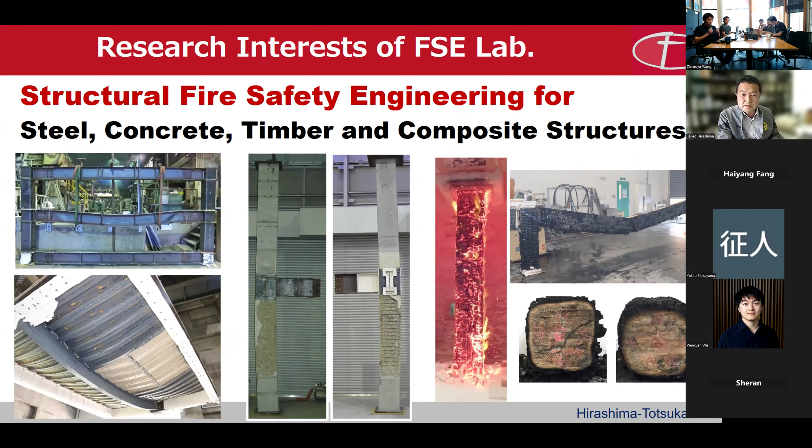Today, I'd like to present our study on the fire resistance of mass timber structures. Topics of the presentation are: backgrounds of the study on timber structures in fire, our studies on mass timber elements exposed to fire including the cooling down phase, and the current actual design of high-rise timber buildings in Japan. The next topic is timber-steel connections, presented by Mr. Nakayama.

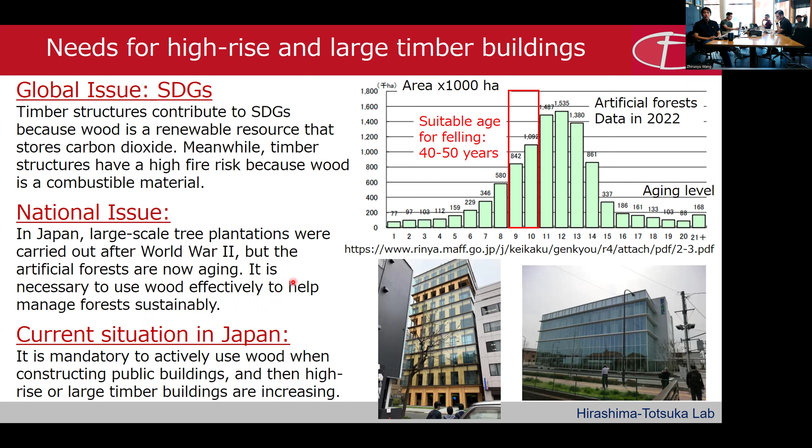SDGs is a global issue, and timber structures contribute to SDGs because it is a renewable resource that stores carbon dioxide. Meanwhile, timber structures have a high fire risk because it is a combustible material. In Japan, large-scale tree plantations were carried out after World War II, but the artificial forests are now aging. It's necessary to use it effectively to help manage forest sustainability. It's mandatory to actively use wood when constructing public buildings, and high-rise or larger timber buildings are increasing now.

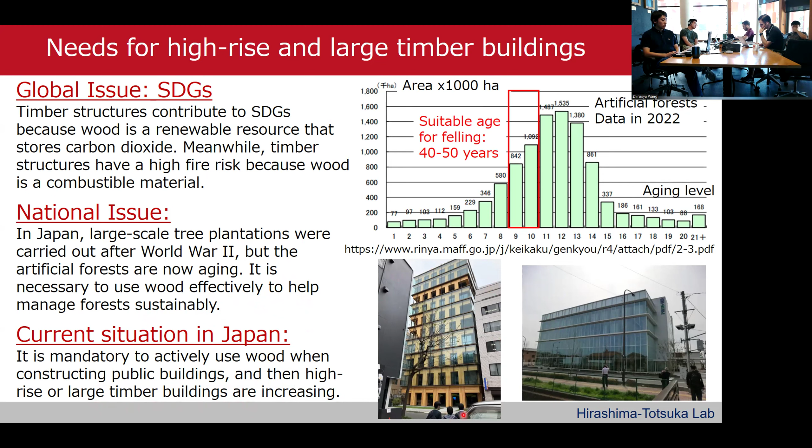Timber is a complex material to handle when designing structures because it is inhomogeneous and highly variable due to being a natural material. It is also orthotropic and combustible. Meanwhile, it is lightweight with high-grade insulation compared with other structural materials, so the density and thermal conductivity of timber are quite low values. Additionally, by using adhesive, it can be turned into mass timber elements.

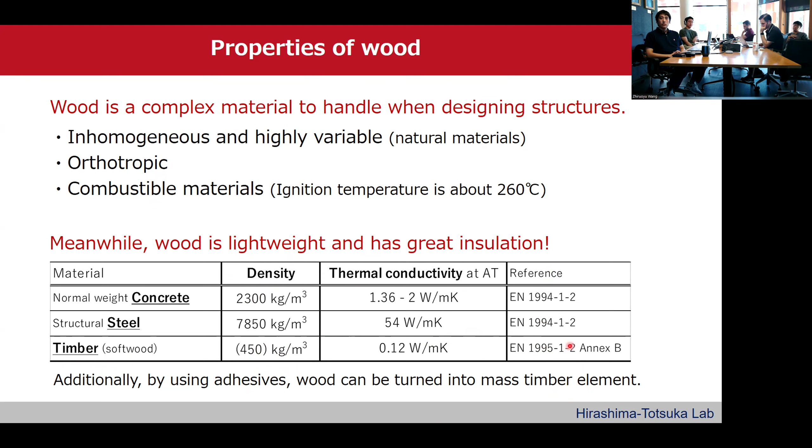The reduced cross-section method is the most popular method in the design of timber structures. It has low thermal conductivity, so the temperature inside the cross-section of a mass timber element remains low during a fire, and it can be designed using standard structural calculation methods. When using this method, the charring depth or charring rate of the wood must be properly determined. In Japan, the design charring depth is 0.75 millimeters per minute, which is approximately the same as that given in Eurocode 5 for softwood.

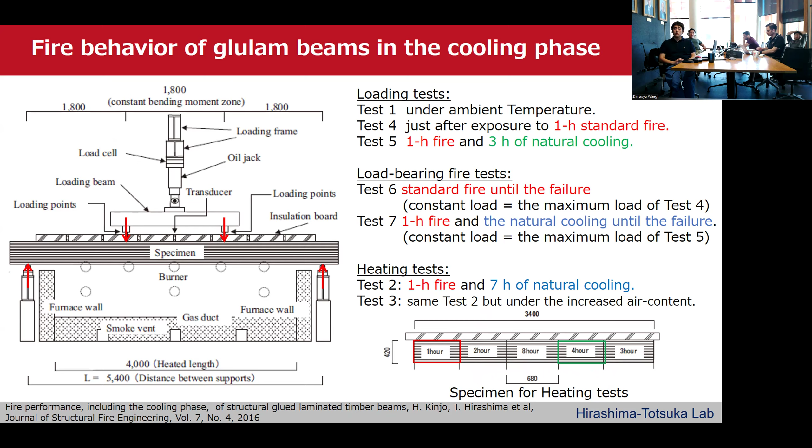The temperature at the center of the cross-section, the centroid, just after heating for 1 hour was close to ambient temperature. But then the temperature rose, reaching 100 degrees after 4 hours.

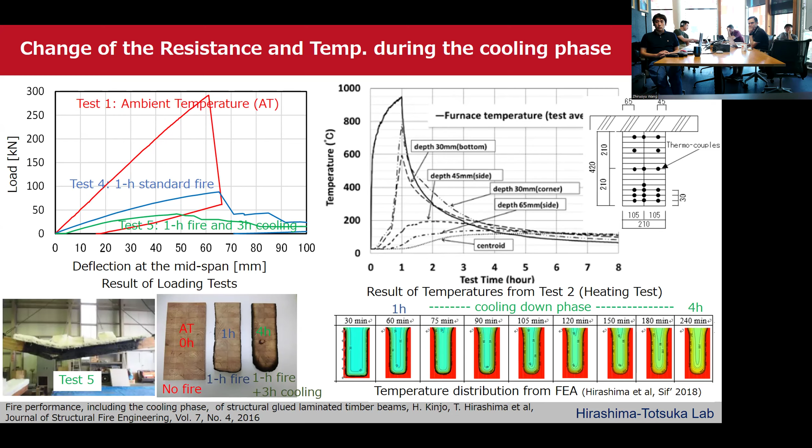Annex B of Eurocode 5 advanced calculation method gives the reduction factor for strength parallel to the grain of softwood.

The strength of wood at high temperatures decreases more in compression than in tension, and is significantly affected by moisture content. This has been demonstrated through previous experimental studies, and these figures are examples of those reports.

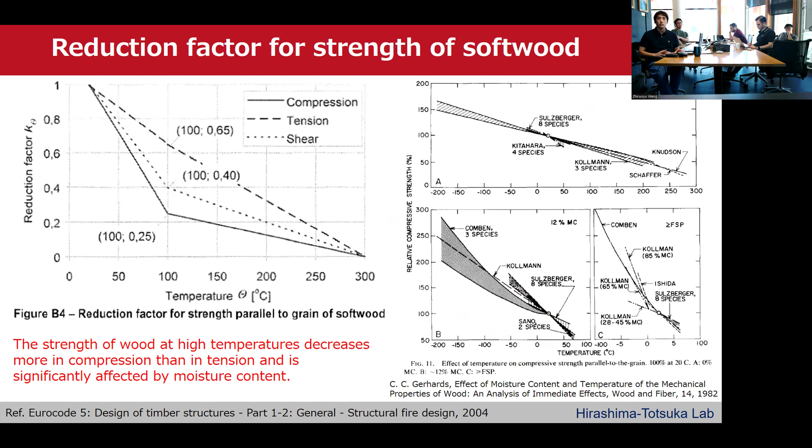So now I will summarize our background.

Due to increasing social demand for the use of wood, higher or larger timber buildings are increasing, and the reduced cross-section method is reasonable for predicting the resistance of timber elements exposed to ISO fire heating. But meanwhile, the resistance of timber elements considerably decreases during the cooling down phase after heating. We needed to understand the change in resistance during the cooling phase, considering the strength of wood at high temperature.

Next, I'd like to introduce our experimental study on the influence of temperature and moisture on compressive strength of wood.

We investigated the compressive behavior of softwood at high temperature using a conventional oven and a loading device. The test parameters were temperature and heating time, and we also investigated the weight change due to water evaporation. The test specimen was loaded immediately after heating, and it took approximately 5 minutes to complete the test.

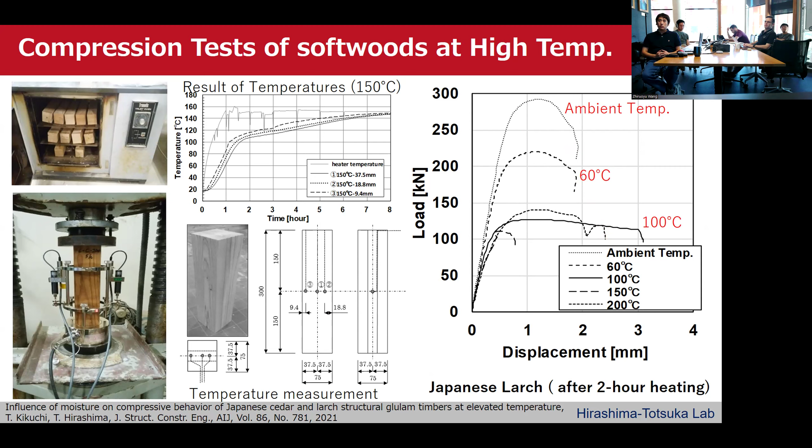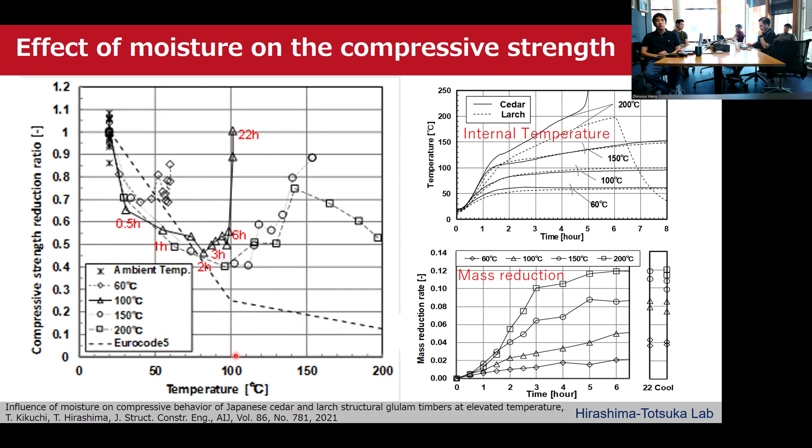Next is experimental and numerical studies on the load-bearing capacity of mass timber columns exposed to fire, including the cooling down phase.

In the load-bearing fire tests of mass timber glulam columns, the test parameters were heating time, load ratio against allowable design load for a long period, tree species, and cross-sectional dimensions.

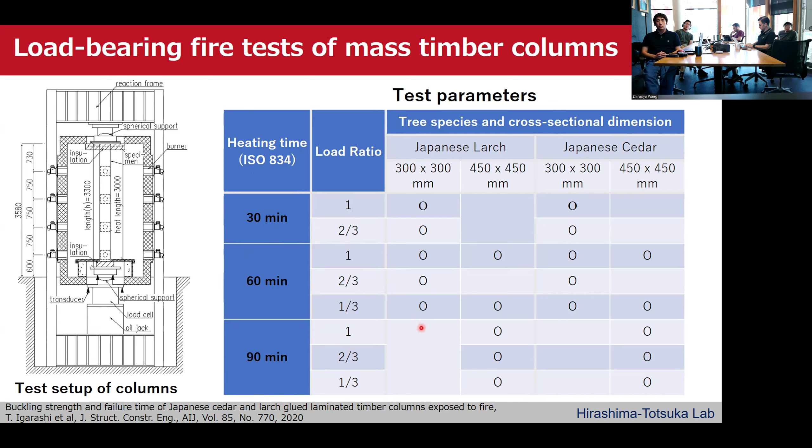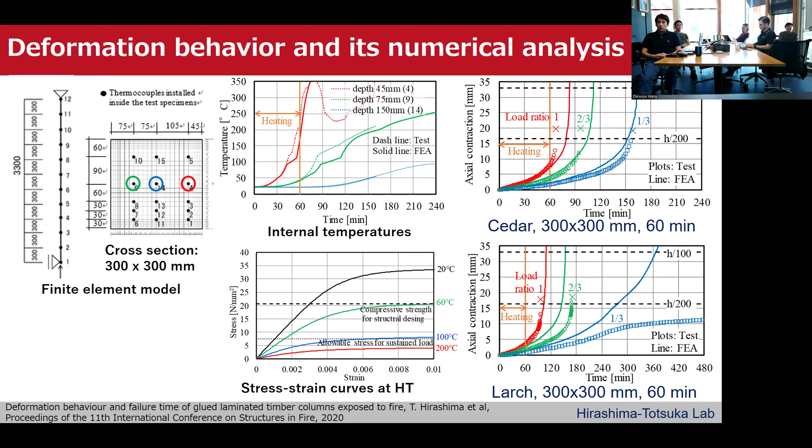However, it's unclear whether the condition when cooled inside the furnace is the same as the condition during an actual fire.

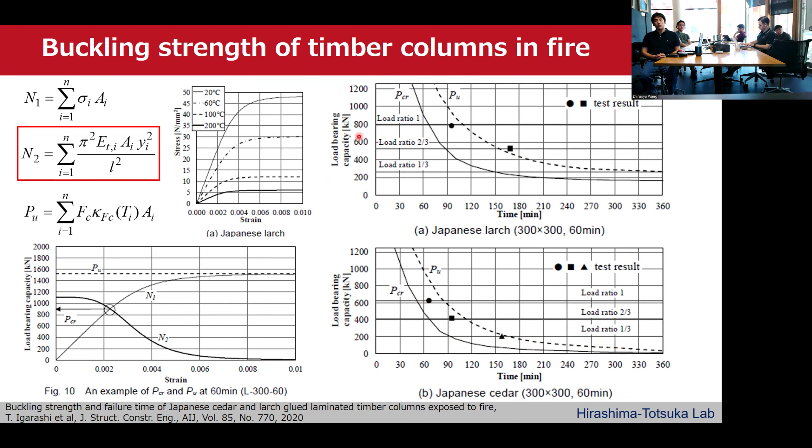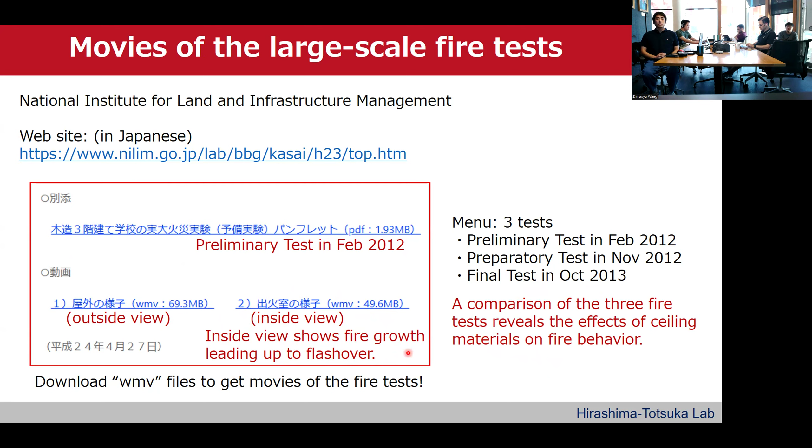So these are findings from our studies, and the next step. The strength of wood decreased considerably up to 100 degrees, and the compressive strength is highly dependent on moisture content.

The changes in buckling resistance of mass columns and the failure time, including the cooling phase, can be predicted by numerical analysis, if the temperature distribution and the mechanical properties at high temperatures can be appropriately determined.

But from the full-scale fire test of the wooden 3-story school building, in case of an actual fire, room temperature is significantly different from the ISO standard of fire heating. In addition, in the case of timber structures, the room temperature remains high for a long time during the fire decay phase. A further study on the actual fire behavior of timber structures is required.

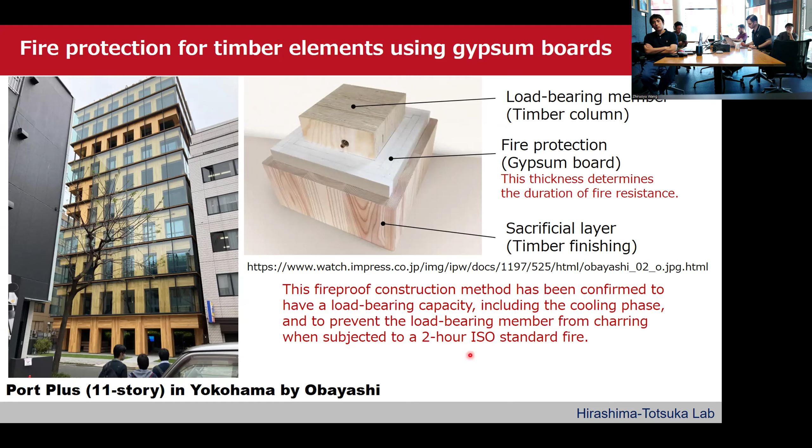The next slide shows the hybrid structure with steel elements encased by mass timber. This fireproofing method uses dense Japanese larch and has been proven to eliminate the red heat reaction of wood during the cooling phase after heating of a 1-hour standard fire.

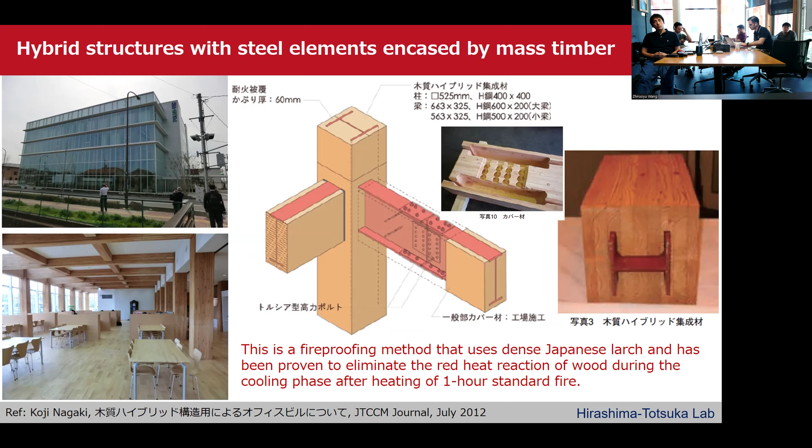I'd like to summarize these lectures. I showed you understanding of fire behavior of timber structures, the reduced cross-section method for structural design, and structural fire behavior of timber elements during the cooling down phase, especially the load-bearing capacity of mass timber columns exposed to fire, including the cooling phase, influence of temperature and moisture on compressive strength of wood, and actual fire behavior obtained from full-scale fire tests of timber buildings.

And I also introduced high-rise timber buildings with fire protection in Japan, using gypsum board and hybrid structures with steel elements encased by mass timber.

Okay, it's finished. Thank you for your kind attention. Thank you very much.

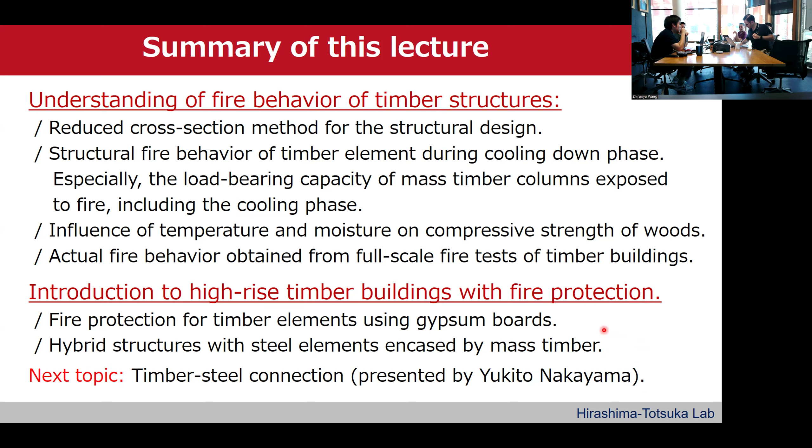Professor Hirashima, thank you so much for this presentation. Sorry, please pronounce loudly. I think now it's good. Professor Hirashima, okay good, thank you very much. Thank you so much for your presentation, we learned so much from your talk. I just have one question: from your experience, what is the most important research question that we need to answer about the fire safety of timber to be able to use it much more in our built environment?

Sorry, most important things to construct tall timber buildings, I can't... sorry, I can't understand your question.

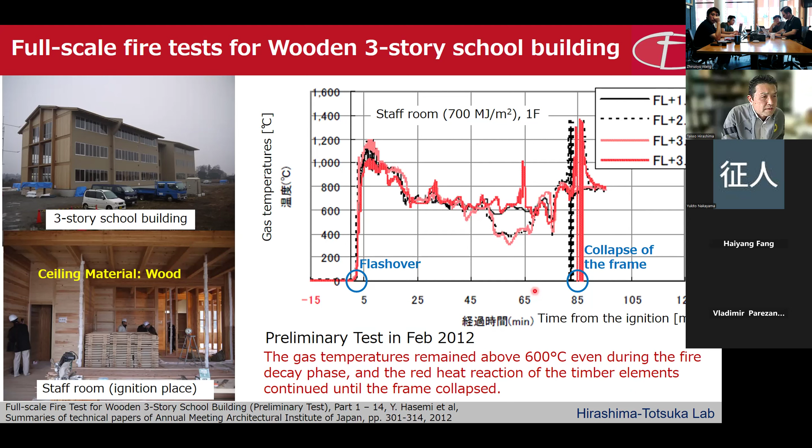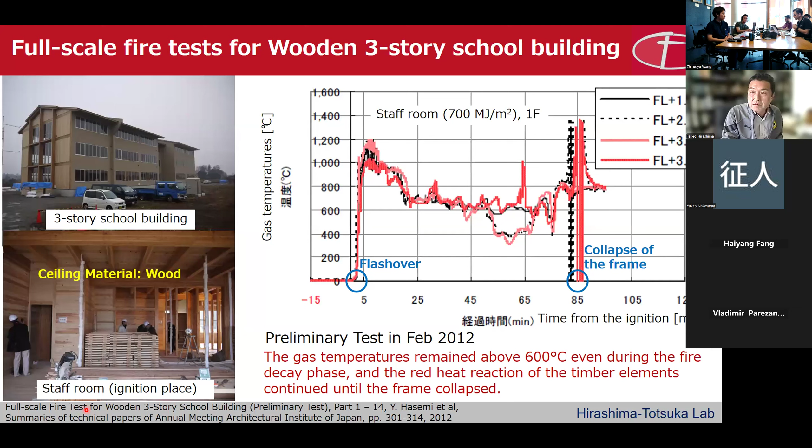Should I translate? Can you hear what he's talking about? Preliminary, so sorry. But he said he cannot 100% receive the question you asked. Sorry, please, it's in the chat, I will just type the question in the chatting box. Okay. How can I see the chatting box? Can I shut my share slide? Yeah sure, okay. Sorry, where is it, okay chat, okay no, oh sorry, I can see the chat, thank you.

It's possible: what is the most important question to be answered to be able to use timber more broadly in modern buildings? Okay.

I showed one of the solutions of using timber structures, for example fire protection by gypsum board. This is the most popular method in Japan, so it's easy to improve the fire resistance of timber structures, I think. But I think it's also important to understand the change of resistance in timber structures during a fire situation. So this is the motivation of our study.

Here's what we will be focusing on today. I will put special emphasis on timber dowel connections, as they are one of the most commonly used connection types in mass timber construction. First, we will look at what dowel connections are and how they behave in a fire. Then we will explore some of the fire safety approaches used in mass timber buildings in Japan, particularly in the context of earthquakes and post-earthquake fires.

Finally, we will dive into wood plugs. One disadvantage of this type of connection is that it has a steel component inside of it, so we usually use wood plugs to conceal these steel components to reduce heat transfer, as steel has high thermal conductivity. Finally, we will discuss how they function as fire protection and their impact on the overall fire behavior of timber structures.

Here's a quick look at what we will be covering today. First, I will give an overview of the topic to set the stage. Then we will dive into the fire resistance of dowel connections, followed by an explanation of fire design approaches in Japan. After that, I will walk you through the results of our two experimental programs: the heating test on dowel connections, and fire tests on large-scale timber frames with dowel connections. Finally, we will wrap up with some key takeaways in the conclusion.

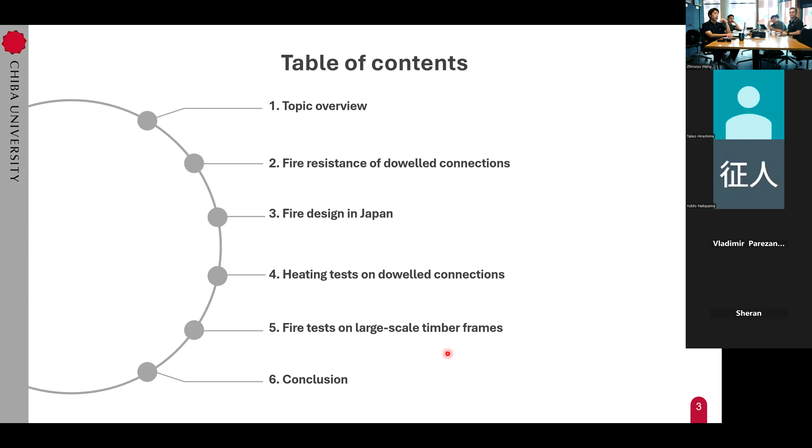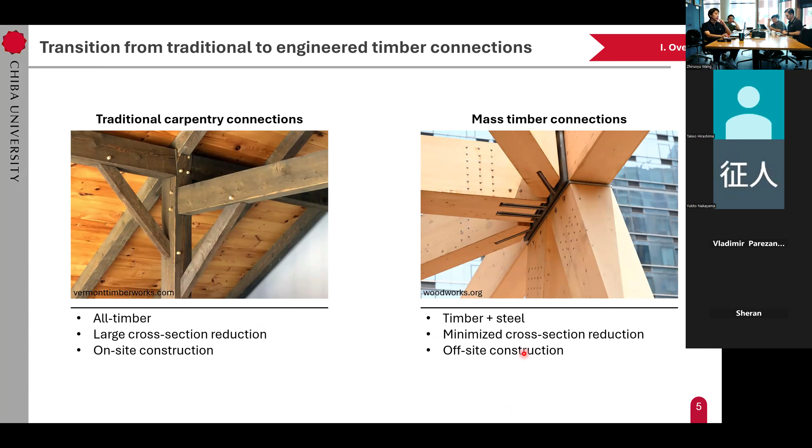Now let's start with a brief overview of the topic. In traditional wooden houses, carpentry connections are the go-to method. These joints are usually entirely made of timber. But in modern mass timber construction, we usually use connections that combine steel and timber. These types of connection offer several advantages, like minimal cross-section reduction, high stiffness, and high load-bearing capacity, plus they can be prefabricated off-site, which improves construction efficiency.

Broadly speaking, we have five main types of mass timber connection. The first is a glued connection, where we use adhesive to stick two timber blocks together. This type of connection is known to behave almost like a rigid connection. We typically use it for finger joints, where we stick two laminates together.

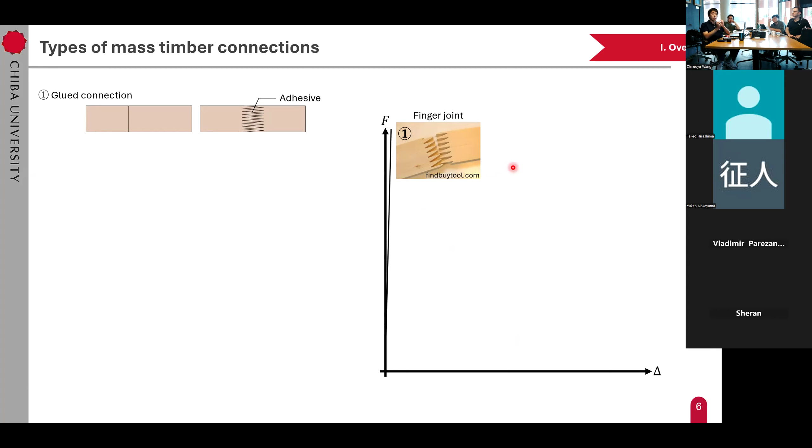The second type is a truss plate. Truss plates have a lot of spikes that penetrate the timber to form a connection. Truss plate connections have very high stiffness but poor ductility. We usually use this in truss joints.

The third type is the through-bolted connection. One key characteristic is that it has clearance between timber and steel, which causes initial slip in the early stage of loading. Due to its low stiffness and low bearing capacity, we usually use it as a positioning aid.

The next type is a nail connection. These nails are very flexible. This type of connection has poor performance, so we usually use a lot of nails to form a stiffer connection.

The last connection type, and today's topic, is tight-fit dowel connections. The key difference between tight-fit dowel connections and through-bolted connections is that tight-fit dowel connections have no clearance between timber and steel. Thanks to the friction between these two materials, they have moderate stiffness and moderate load-bearing capacity. One key characteristic of this type of connection is that it has high ductility.

Since Professor Hirashima talked about structural members such as beams and columns, I would like to put special emphasis on dowel connections in my talk today.

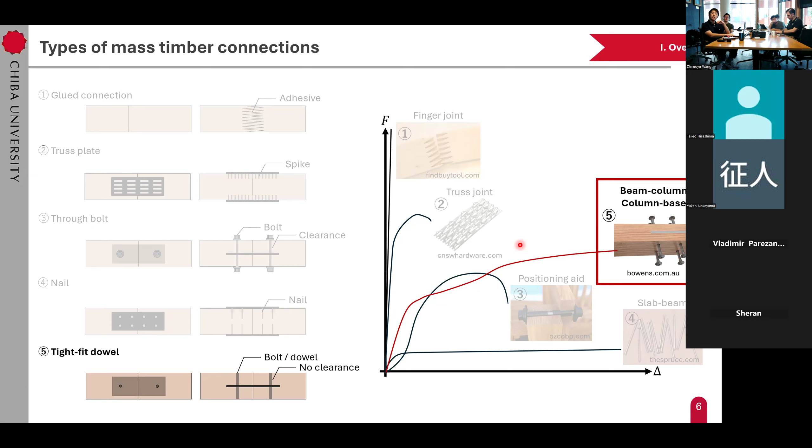Here are some real-world applications of dowel connections. You can find them in many high-rise timber buildings around the world.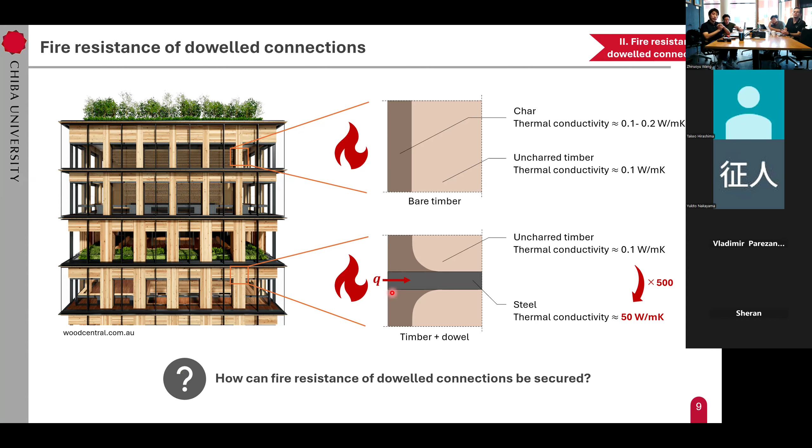We can generally classify dowel connections into three main types, each with different fire performance. The first type is steel-wood-steel connections, where we sandwich a timber member with two steel plates and insert dowels through all three layers to form a connection.

The second type is wood-wood-wood connections, in which we place three timber members together and embed dowels into them, creating a fully timber-based connection. The third type is wood-steel-wood connections, where we insert a slotted-in steel plate between two timber side members and secure it with dowels.

Because steel has high thermal conductivity, SWS connections exhibit the lowest fire performance among the three types. In contrast, WSW connections typically provide the highest fire performance, since the timber side members effectively insulate the steel plate, minimizing temperature rise in the steel.

Now let's shift our focus specifically to the fire performance of unprotected wood-steel-wood connections. Many researchers have conducted fire tests on dowel connections to determine which factors most influence their fire resistance. In the next few slides, I will summarize which factors significantly affect fire performance and which ones have only a minor effect. The diagram here shows the dowel connections subjected to tension forces and shear and bending forces.

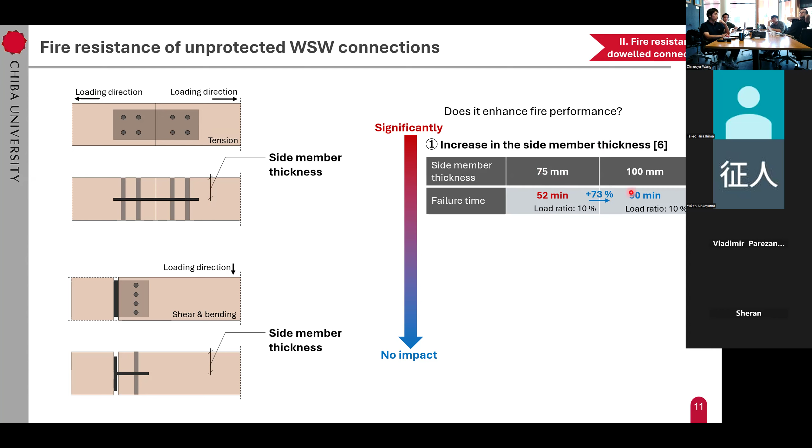One of the most critical factors is side member thickness, which corresponds to the distance from the steel plate to the surface of the connection. It has been found that increasing the thickness from 75 millimeters to 100 millimeters resulted in an increase of failure time by 73%.

Another important factor to consider is the clearance between members. Experiments indicated that closing the clearance led to a 45% increase in failure time, highlighting the importance of tight-fitting connections.

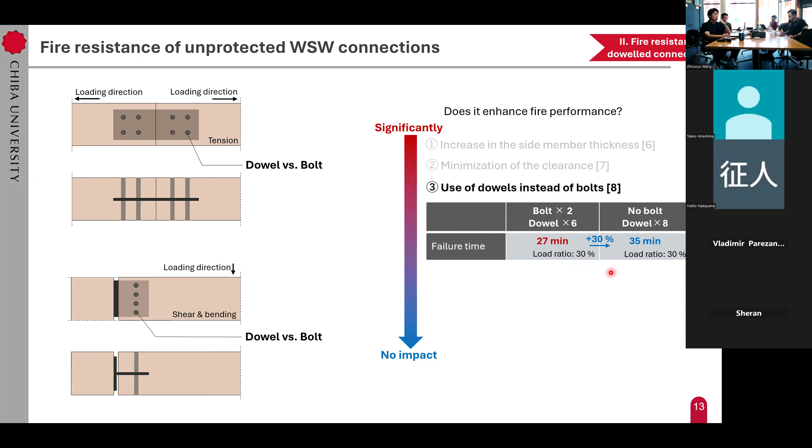The type of fastener also plays a role. Studies have shown that using dowels instead of bolts had a slight impact on fire performance. In a numerical parametric study, two models were compared: one with 2 bolts and 6 dowels, the other with no bolts and 8 dowels. Increasing the number of dowels from 6 to 8 resulted in a 30% increase in failure time.

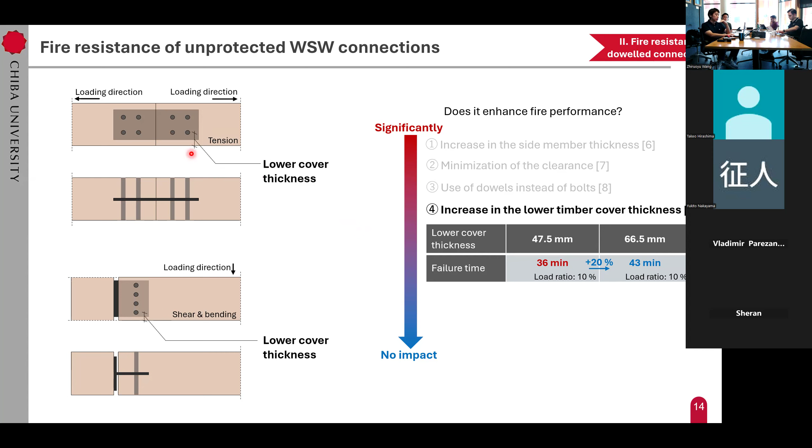Additionally, increasing the lower timber's cover thickness, which corresponds to the distance from the bottom dowel and the bottom surface of the connection, has been found to have a moderate effect. As you might expect, adding more timber at the bottom of the connection provides extra insulation, which resulted in a 20% increase in failure time.

A decreased dowel diameter also plays a role in fire performance. Studies have shown that reducing the dowel diameter from 19.2 to 12.7 resulted in a 20% increase in failure time.

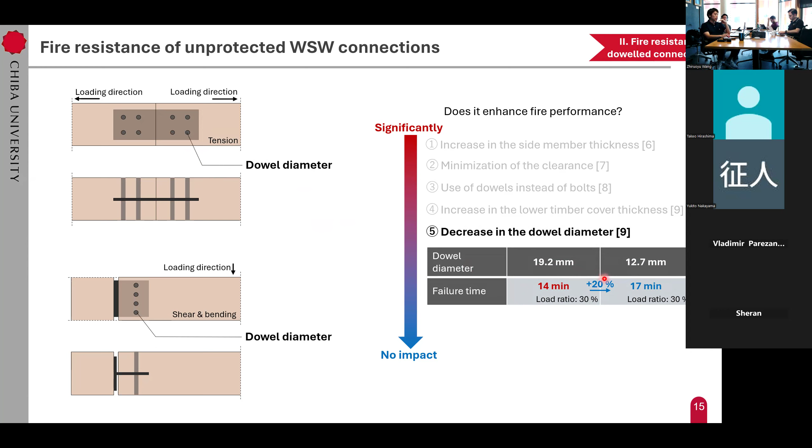However, research has also indicated that simply increasing the number of dowels does not have a significant influence on fire performance. So now that we've discussed ways to reinforce the fire performance of unprotected dowel connections, let's shift our focus to fire protection methods. There are 3 common approaches to protecting dowel connections in a fire.

The first method is wood plugs. Wood plugs are typically embedded into dowel holes to conceal steel dowels and minimize heat transfer through steel. They work as very effective fire insulation, which slows down temperature rise within the connection. Studies have shown that even a 30 millimeter thick wood plug can increase failure time by 182%, highlighting its effectiveness as a simple yet powerful fire protection measure.

Intumescent coatings are another effective fire protection method. When applying them to dowel connections, we typically cover all steel surfaces to minimize heat transfer. For SWS connections, the exposed steel plates are coated with intumescent material to reduce heat flux. In WSW connections, we usually fill all the gaps where the slotted-in steel plate could transfer heat.

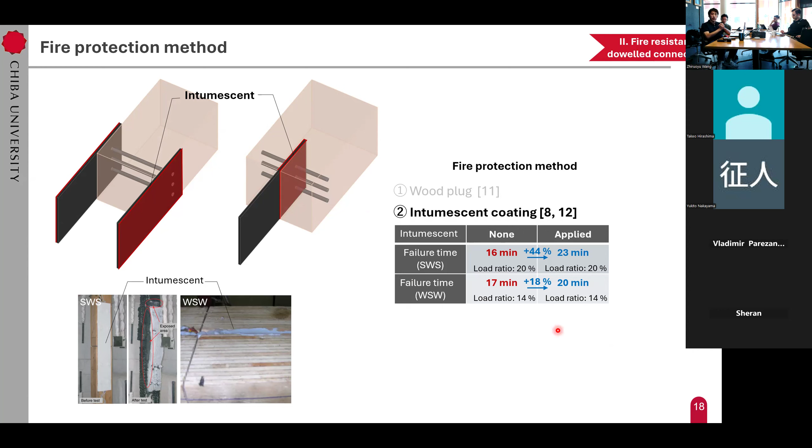Studies have shown that applying intumescent coatings to SWS connections increased failure time by 44%, while WSW connections exhibited only an 18% increase. This suggests that intumescent coatings are more effective in SWS connections where the steel surface is more exposed. As many of us already know, plasterboards significantly extend failure time as well, offering highly effective fire protection.

The findings from these studies have been applied in real-world projects, particularly in large-scale timber construction. A great example is Mjøstårnet, the world's tallest pure timber building. In this building, all dowels are embedded 85 millimeters into wood. This thickness corresponds to the charring depth after 120 minutes of heating.

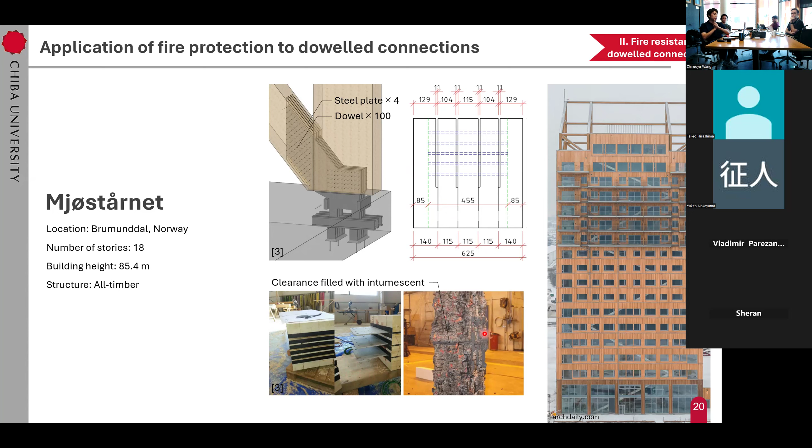Additionally, all connection clearances are fitted with intumescent fire strips, which expand at temperatures above 150 degrees, sealing the connection against fire penetration. To validate this design, structural fire engineers conducted full-scale fire tests, proving that steel plates remained below 250 degrees even after 90 minutes of heating.

Next, let's move on to the next topic.

What structural engineers have done in the context of mass timber construction in Japan. As you might know, Japan is one of the most earthquake-prone countries in the world. While earthquakes are a major concern for structural engineers, they also pose serious challenges for structural fire engineers due to the risk of post-earthquake fires.

For example, in the 2011 Great East Japan earthquake, 31 earthquake-induced fires were reported in Tokyo, despite being 380 kilometers away from the epicenter. Nationwide, 378 post-earthquake fires were recorded, with key causes including ignition of debris caused by tsunami, damage of heating appliances, unexpected electrification, and gas leakage.

To address these risks, we have very strict fire regulations in Japan under its Building Standards Act. There are two fire design protocols for buildings in Japan. The first is quasi-fire resistive structure. To meet the standards, we are required to ensure that the structure does not exhibit damage that would compromise structural integrity for a specified duration of fire exposure.

When we conduct a test to ensure the fire resistance of a structure, we usually use the ISO standard fire. The second protocol is fire resistive structure, which requires a building to remain intact until the fire fully burns out, even after a specified fire exposure duration of 1 to 3 hours without firefighting intervention.

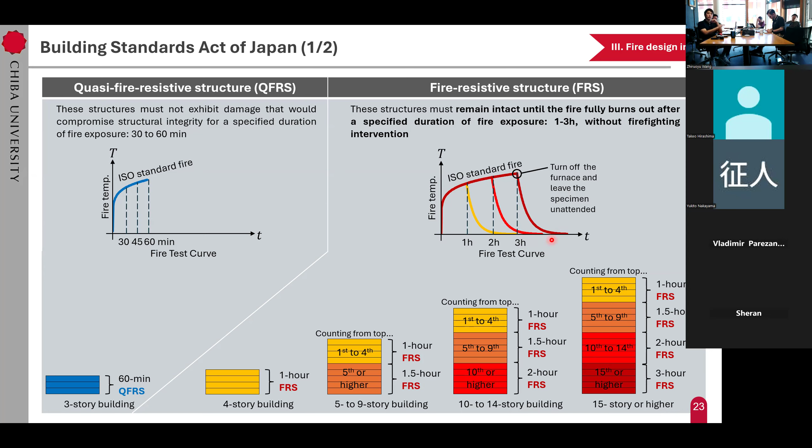To achieve quasi-fire resistance, Japan's most common design approach is the reduced cross-section method, where we assume a charring rate of 0.75 millimeters per minute, which is slightly higher than that recommended in Eurocode 5.

When designing fire-resistive structures using timber, we must ensure that the surface temperature of load-bearing members does not exceed 260 degrees, which is defined as the charring temperature in the Japanese standard. In comparison, Eurocode 5 and Australia standards typically use 300 degrees as the charring temperature, meaning that the Japanese standard is more conservative. For fire-resistive structures, we can choose between prescriptive design and performance-based design.

In prescriptive design, we typically use plasterboards to keep the temperature of load-bearing members below 260 degrees, or alternatively, a steel timber hybrid system where timber serves as insulation for steel components. Performance-based design is rarely used in Japan, but involves CFD simulation or full-scale fire test.

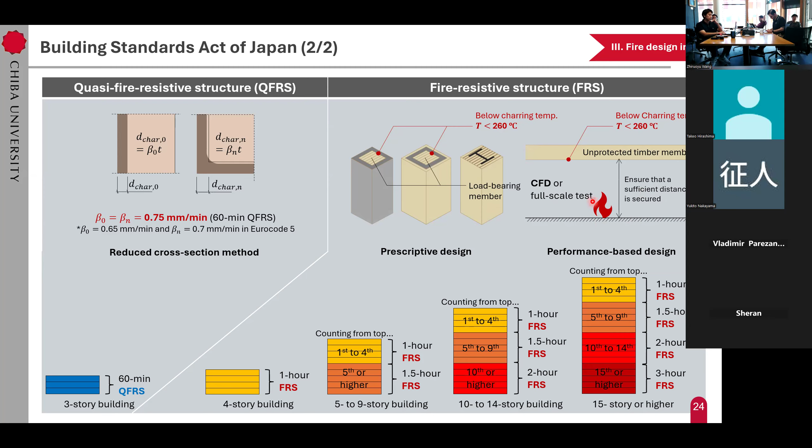So far, we talked about fire regulations in Japan. So now let's take a look at how engineers manage to meet these requirements to design high-rise timber buildings in Japan. The first example I would like to share is the Osaka Timber Trading Hall, a 3-story pure timber building. This project demonstrates how fire safety can be achieved while preserving the aesthetic and structural benefits of timber.

To meet fire-resistant requirements, the building uses non-combustible mortar and sacrificial timber layers. These layers not only provide effective fire protection, but also allow the structure to maintain a natural timber appearance. The connection used in this building is WSW dowel connections. These connections are covered by mortar and timber layers, ensuring that the steel components remain insulated from heat.

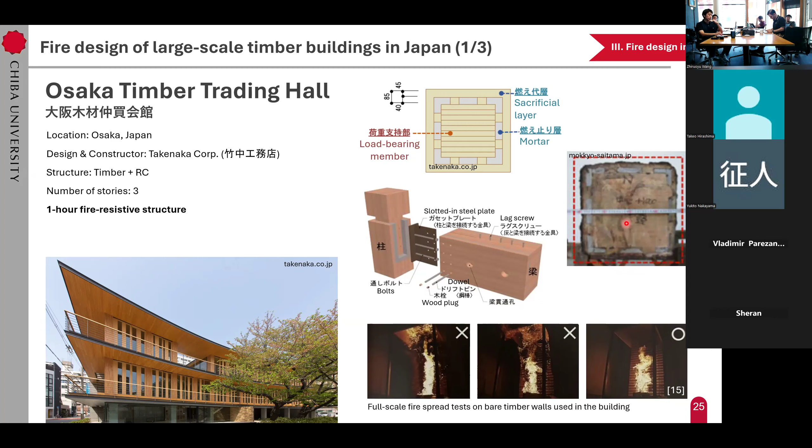To verify its fire performance, a full-scale fire test was conducted. After 1 hour of fire exposure, the load-bearing member remained uncharred, as you can see in this photo, demonstrating the effectiveness of this fire protection strategy.

Finally, let's look at Japan National Stadium, a great example of hybrid steel timber construction. This stadium features steel timber hybrid trusses with a 60-meter span, combining the strength of steel with the benefit of timber. A full-scale test showed that the timber layer improved truss stiffness by 25%, while also acting as fire insulation. This demonstrates how timber can enhance both structural performance and fire safety in hybrid structures.

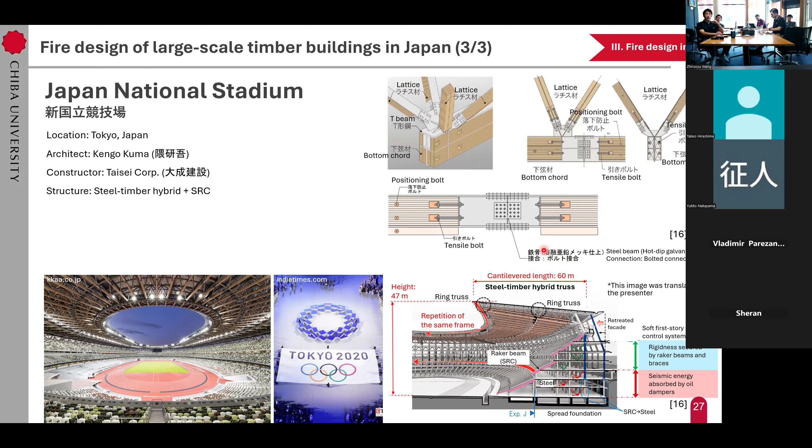This example demonstrates that plasterboards and sacrificial timber layers are highly effective in providing fire resistance. However, while they offer strong protection, they also come with high construction costs, which can be a major limitation for large-scale timber projects. The reduced cross-section method is only permitted for buildings up to 3 stories.

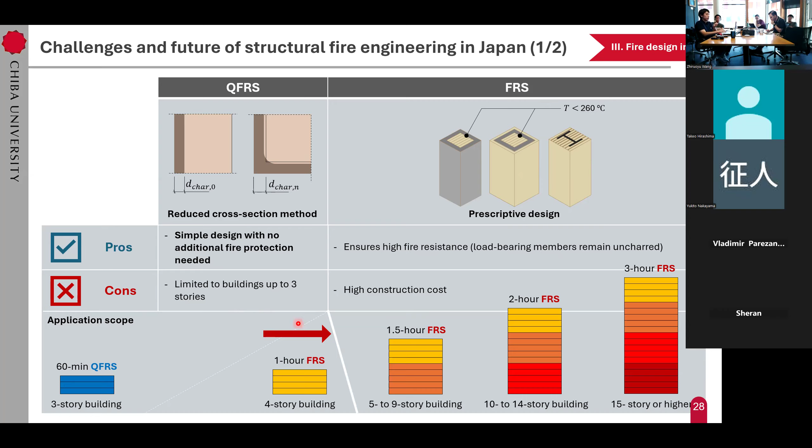If we want to promote timber buildings further, we need to expand the application scope of this method. However, this raises a critical question. As I explained earlier, timber around the dowel experiences high temperature and faster charring. So how can we ensure the fire safety of dowel connections without relying on plasterboard?

To address this question, the Japan Laminated Wood Products Association conducted a series of fire tests on timber frames with dowel connections. Their findings showed that 20mm thick wood plugs were sufficient to allow load transfer from beam to column for more than 60 minutes.

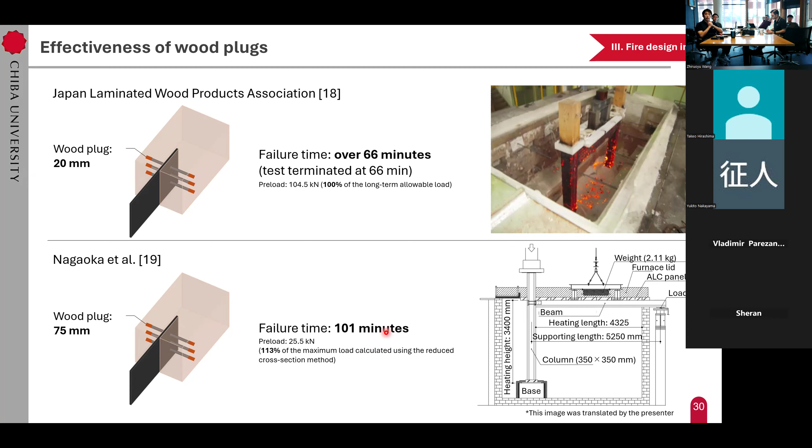Additionally, Nagaoka et al. carried out a fire test on timber frames with dowel connections covered by 75mm thick wood plugs. Surprisingly, the specimen withstood 101 minutes of exposure to the standard fire curve, demonstrating significantly higher fire resistance than expected. These results suggest that wood plugs serve as effective fire protection with minimal construction effort compared to more conventional fire protection methods like plasterboard.

Under these circumstances, our fire safety engineering lab at Chiba University aims to develop efficient fire design strategies for mass timber construction without relying on plasterboard. To achieve this, we conducted 2 experimental programs: heating tests on dowel connections and full-scale fire tests on timber frames with dowel connections. In the heating test, our goal was to investigate how wood plug thickness affects temperature distribution.

To study this, we prepared 6 dowel connections with wood plug thickness ranging from 10 to 60 millimeters. For the full-scale fire test, we exposed the timber frame with dowel connections to 60 minutes of standard fire, followed by a cooling phase. This test aimed to examine the fire behavior of timber frames and to understand how dowel connections influence fire performance during both heating and cooling phases.

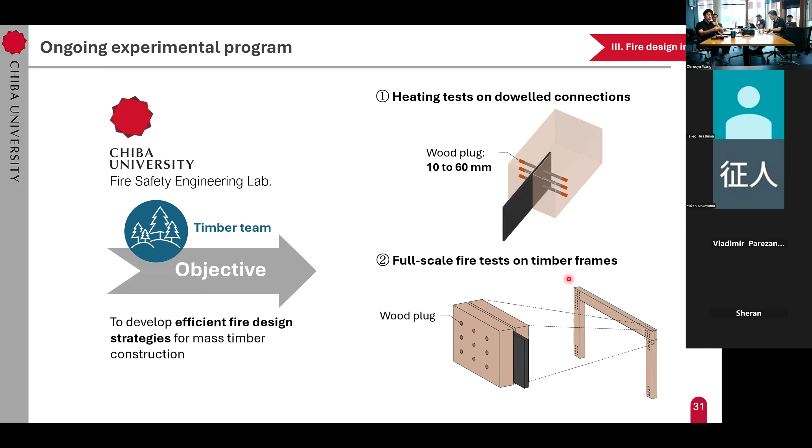In the next two sections, I would like to share some of the findings from our two experimental programs. Let's start with heating tests.

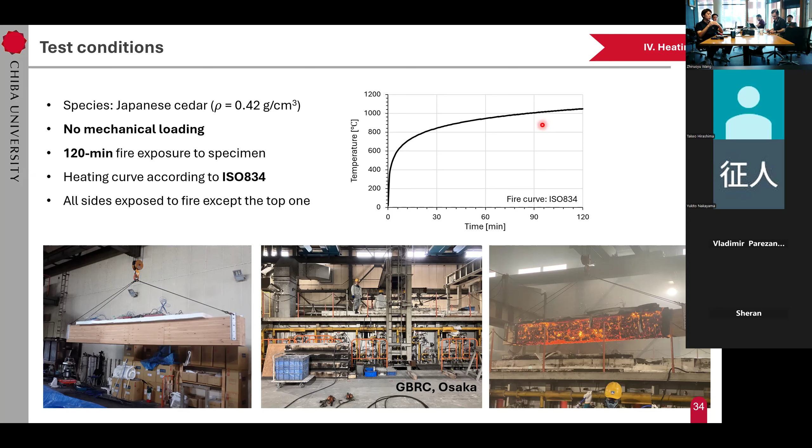We conducted the heating test with the great support of GBRC Osaka, where we heated the specimen according to the ISO standard fire curve for 120 minutes without mechanical loading. We exposed the specimen on all sides except the top one to replicate the existence of a slab.

This slide compares dowel head temperatures for different wood plug thicknesses. We installed thermocouples at the dowel heads in the top, middle, and bottom rows, and the bold lines in this graph represent the average of the 3 measured temperatures. The y-axis shows temperature and the x-axis represents time.

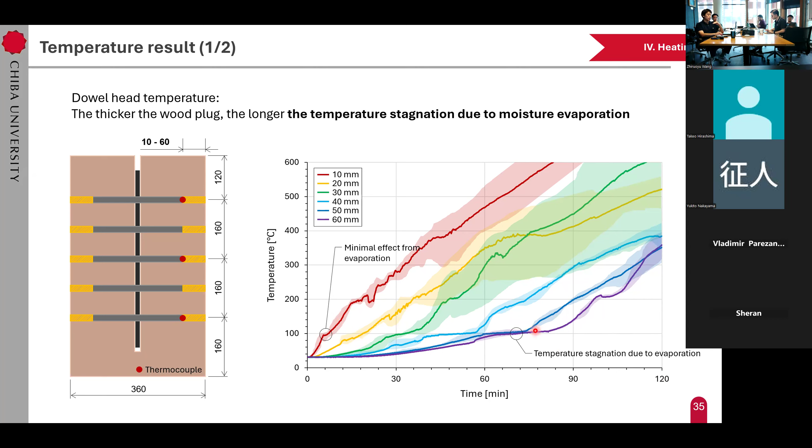From the graph, we can see that with 10 millimeter thick wood plugs, the temperature rose rapidly right after the test started. In contrast, with 60 millimeter thick wood plugs, the dowel head temperature stabilized at 100 degrees Celsius, indicating a cooling effect by moisture evaporation.

This moisture-driven temperature stagnation can also be seen in the shape of the char layer around the connection. With 10 millimeter thick wood plugs, the char depth around the dowel head was deeper than in the surrounding timber, while with the 60 millimeter thick wood plugs, it was shallower.

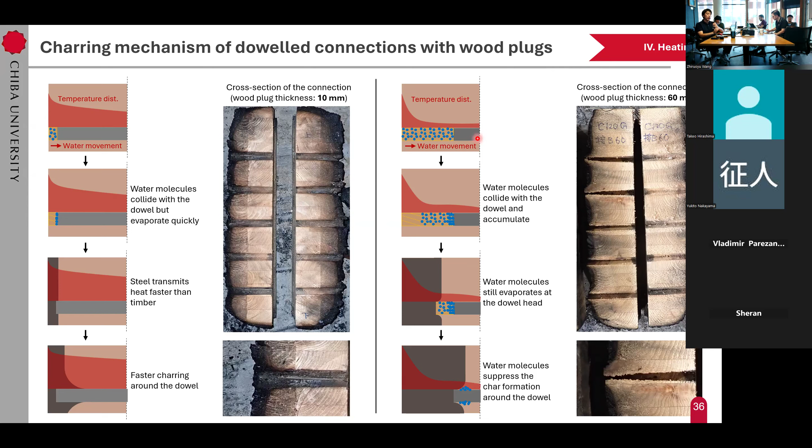For the 10 millimeter thick wood plugs, there was less moisture ahead of the dowel head, so water molecules moved from the high temperature zone to the low temperature zone, hit the dowel, and evaporated quickly. Since steel conducts heat faster than timber, this led to faster char formation, creating deeper char layers around the dowel heads. In contrast, with 60 millimeter thick wood plugs, the higher moisture content within the thicker plug requires more time for evaporation, prolonging the temperature stagnation period and delaying heat transfer, which appears to suppress char formation around the dowel heads.

Now let's take a look at fire tests on timber frames with dowel connections. We tested two types of specimens: a simply supported specimen and a frame specimen with dowel connections. Both had supporting spans of 6,000 millimeters and a loading span of 1,200 millimeters, but their structural conditions differed.

In the simply supported specimen, we used pinned conditions, while in the frame specimen, we applied semi-rigid beam and restraint conditions. Additionally, we used hydraulic jacks to restrain the displacement of both ends of the extruding steel cantilevers in the frame specimen.

For the frame specimen, we measured 4 forces: the applied load to the beam and the resistant forces at the ends of the steel cantilevers. This is because we wanted to measure the bending moment distribution of the specimen.

For the simply supported beam, we measured the applied load, which allows us to calculate the reaction forces at the beam end supports and determine the bending moment at the beam's midspan using structural mechanics.

From the frame specimen, we measured the applied load to the beam and the resistance forces at the ends of the steel cantilevers. Since we had a sufficient number of external force measurements, we could also calculate the vertical resistance of the column. Because this specimen was statically determinate, we were able to measure the bending moment at both the connection and midspan.

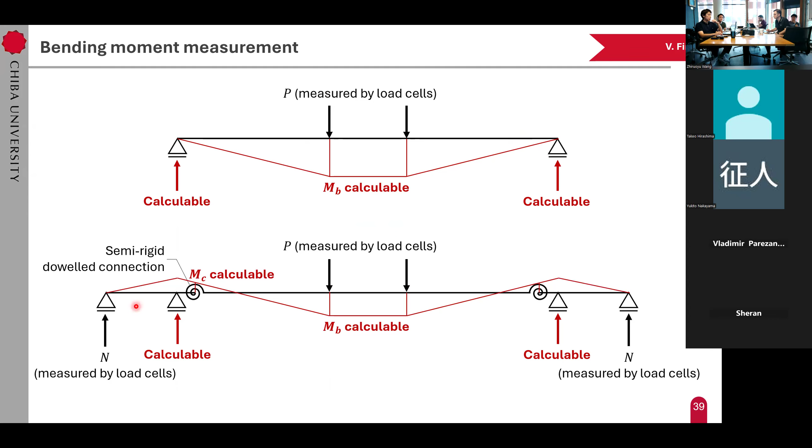But why is measuring bending moment so important? For the simply supported beam, the applied loads remain constant throughout the test, meaning the bending moment distribution does not change. Now, if we consider the bending capacity of the beam, it gradually decreases due to charring and temperature rise. When the bending moment at midspan reaches the bending capacity, bending failure occurs.

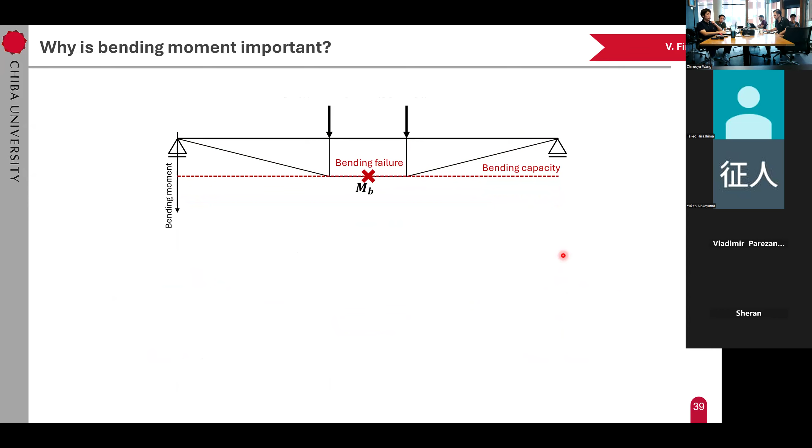However, things are different for the frame specimen. A key factor here is that the ratio of the bending moment at the connection to the bending moment at beam midspan is roughly proportional to the ratio of their stiffness. So if the stiffness ratio decreases and approaches zero, the bending moment distribution will be identical to the simply supported specimen, as the bending moment at the connection becomes zero.

On the other hand, if sufficiently thick wood plugs protect the dowel connections, preventing stiffness loss and increasing the stiffness ratio, the bending moment at the connection will increase. This phenomenon is quite beneficial.

If we think about the bending moment capacity, it decreases over time due to heating and cooling. However, since the applied bending moment at the midspan redistributes to the connections, the bending moment at the midspan does not reach the bending capacity, and bending failure will be deterred. Therefore, only by measuring the bending moment distribution can we accurately describe the failure mechanism of the frame specimen.

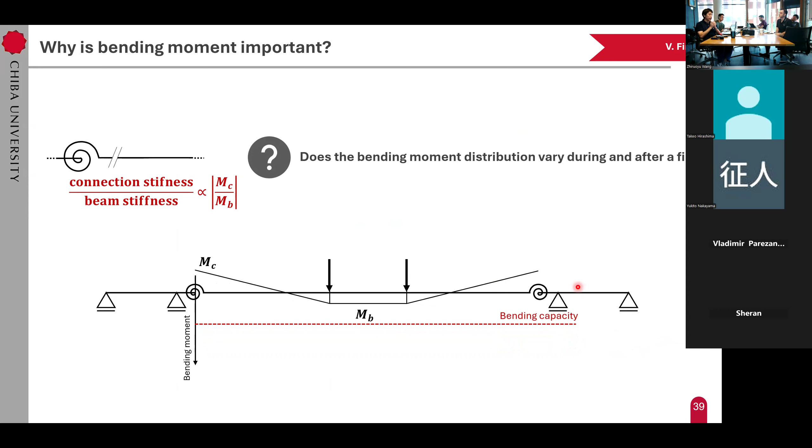To enhance fire resistance of the connections, we applied two critical fire protection measures. First, we used glued-in wood blocks around the dowel heads to reduce heat transfer. Second, we kept the beam-column clearance at 2 millimeters or less, minimizing the heat flux coming into the connection. Additionally, the dowel heads were protected with 40 millimeter wood timber blocks, ensuring both ductility and fire resistance under fire exposure.

We conducted the fire test at GBRC Osaka. We preloaded the specimen to 100% of the design load, calculated using the reduced cross-section method for 60-minute quasi-fire-resistive structures. Then we exposed the specimen to the ISO standard fire for 60 minutes, turned off the furnace, and left the specimen unattended to replicate the decay phase.

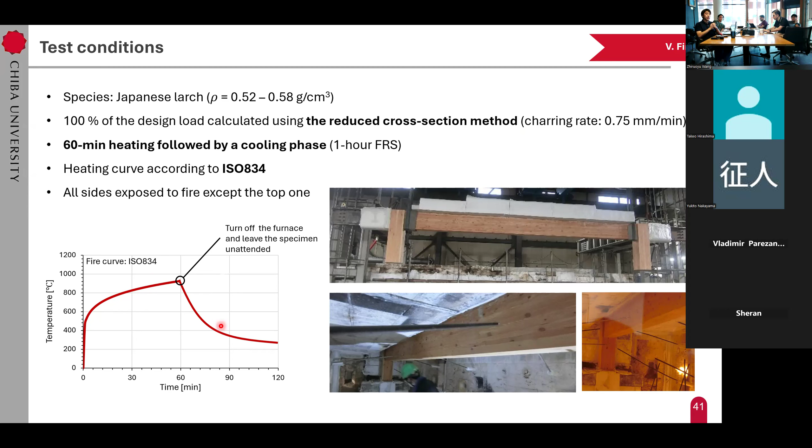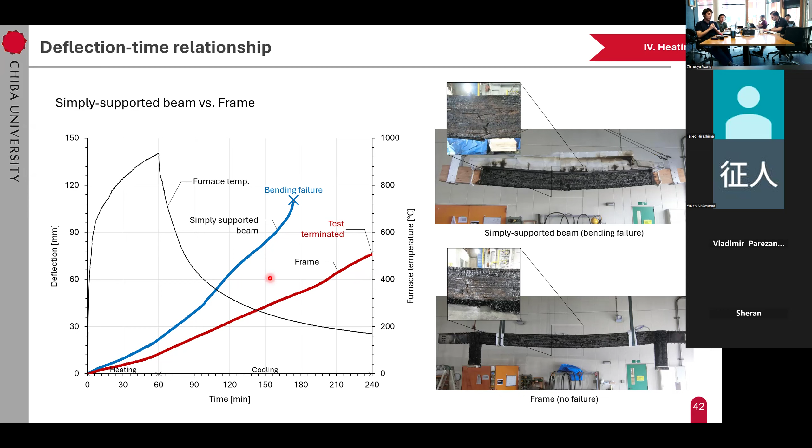While the frame specimen did not fail until 240 minutes, it additionally exhibited lower deflection compared to the simply supported beam, indicating improved fire performance under fire exposure.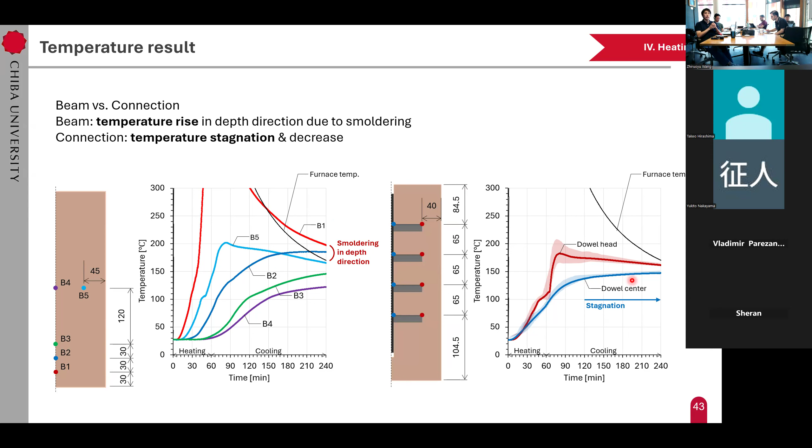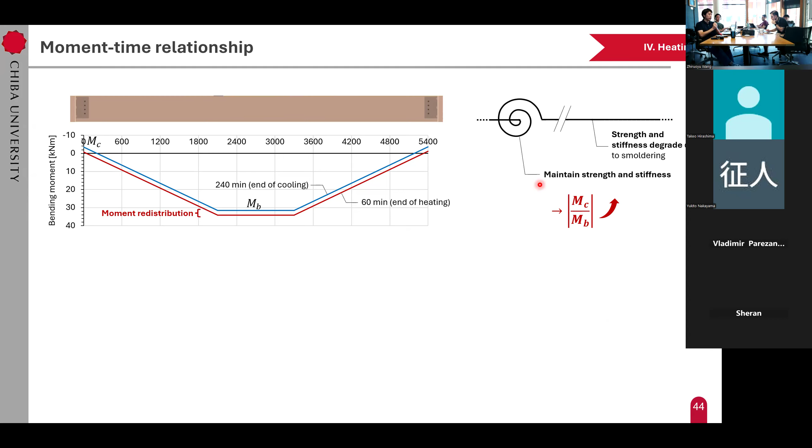As the beam temperature continued to rise, its stiffness and strength decreased, while the connection maintained a stable temperature, keeping its stiffness and strength unchanged. As a result, the bending moment at the midspan was redistributed to the connections.

So finally, I would like to wrap up the presentation with some key takeaways. At the beginning, we discussed how smoldering timber surrounding a dowelled connection burns faster due to the high thermal conductivity of the steel dowel.

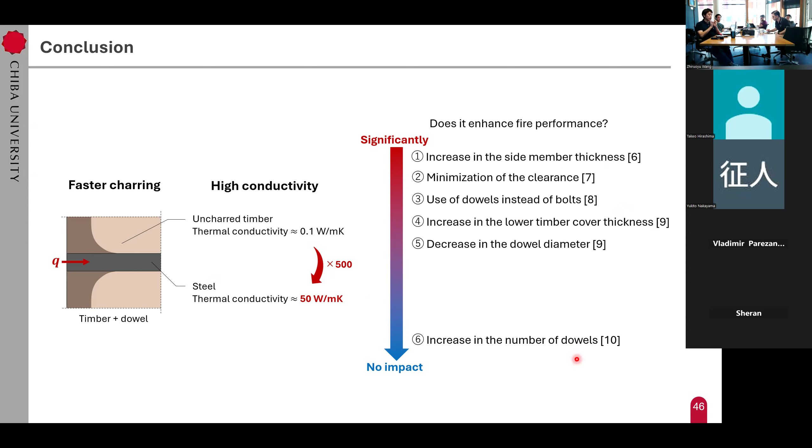We also explored the key factors influencing fire performance of dowel connections. Our findings show several factors improve fire resistance: increasing side member thickness, minimizing clearance, using dowels instead of bolts, increasing timber cover thickness, and decreasing dowel diameter. On the other hand, the number of dowels has no impact on fire performance.

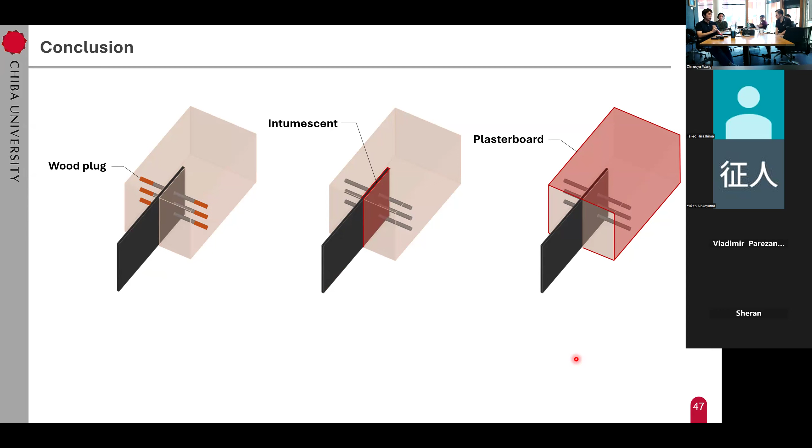After examining fire performance of unprotected dowel connections, we explored three effective fire protection methods: wood plugs, intumescent coatings, and plasterboard. Through our discussion of current fire safety engineering strategies in Japan, we found wood plugs offer advantages such as ease of installation and improved fire resistance. However, due to limited experimental data, we still lack clear understanding of how wood plug thickness affects temperature distribution and overall fire behavior of timber structures.

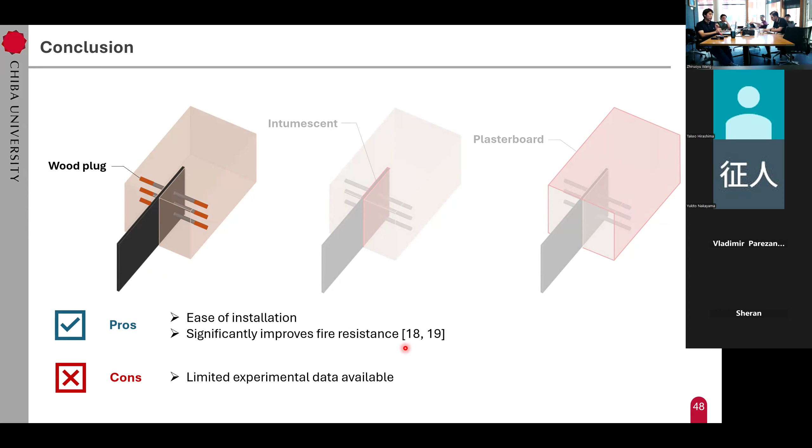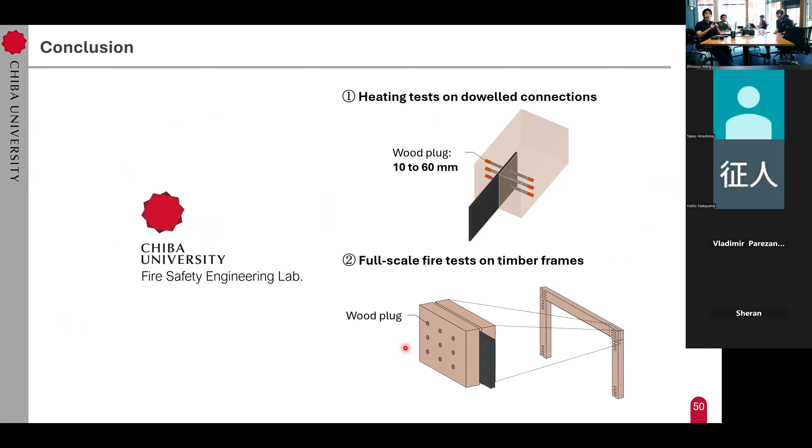On the other hand, plasterboards are widely used in high-rise timber buildings in Japan and provide reliable fire resistance. However, their high construction costs may limit future growth of mass timber construction. To develop efficient fire protection strategies without relying on plasterboard, we conducted two experimental programs: heating tests on dowel connections, and full-scale fire tests on timber frames.

From these experiments, we found moisture content may play a major role in char formation. Additionally, during the cooling phase after 60 minutes of heating, while the beam continued to lose stiffness, the connection maintained its stiffness, leading to moment redistribution. Thanks to this redistribution of bending moment from the beam to the connection, bending failure of the beam was delayed.

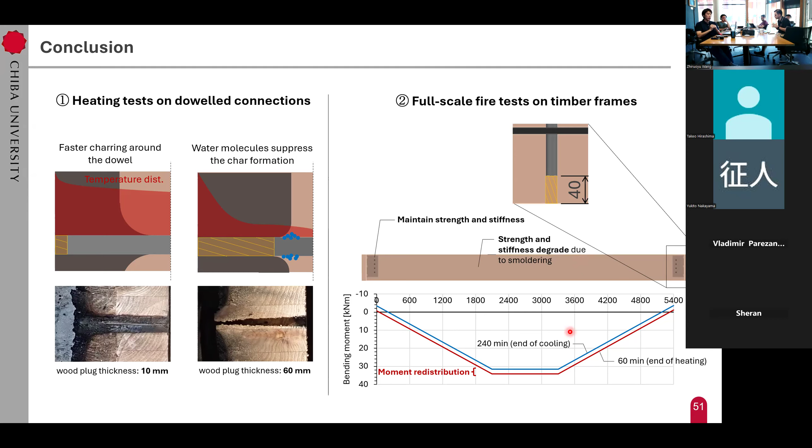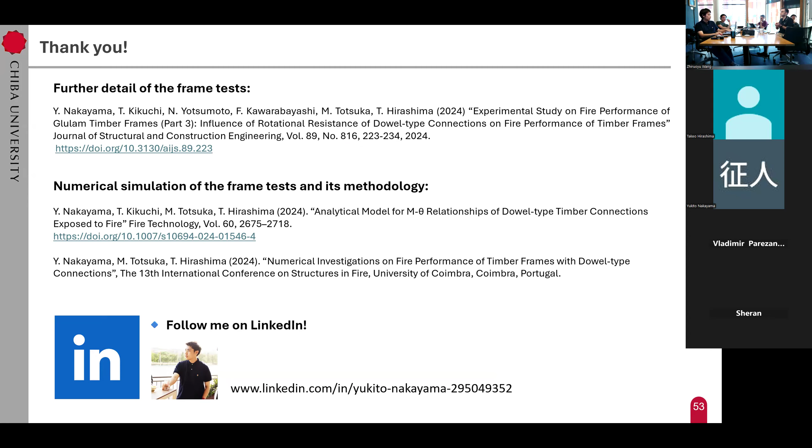Thanks, Yukito. Thanks, Professor Hirashima. Is there any question from online? Is there any question from the meeting room? I've got one, but I'll wait if anybody has one. If anyone online has questions, feel free to type them in the chat box or directly unmute yourself.

I guess a brief question. You used the Japan National Stadium as an example, showing that massive timber elements have better structural performance and fire resistant performance. But the stadium is relatively unique—it's an open space with a tall ceiling, so it's barely impacted by fire, unlike normal office buildings or apartment buildings. I want to know, for normal office buildings applying timber structure, does it have benefit to structural performance, or economically and structurally speaking?

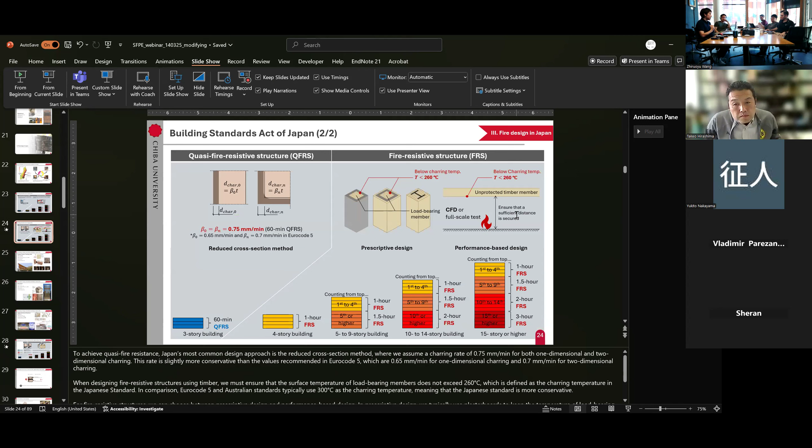The reason why I wanted to introduce Japan National Stadium is that it's a good example of performance-based fire-resistant structures. This stadium could use steel-timber hybrid trusses as the truss system over the seats because there is sufficient distance between the flame and the truss joint, and they checked whether there is sufficient distance from timber to the potential flame. So as you mentioned, this is slightly different from actual buildings using steel-timber hybrid structures.

If we want to use timber-steel hybrid structures in common buildings, we will have to increase the thickness of timber layers to further fire-protect the steel members, because when steel temperature gets above 560 degrees it loses strength. In this stadium, since they checked there is sufficient distance from flame, they used timber mainly for aesthetic reasons and to ensure load bearing capacity at ambient temperatures. But to apply timber-steel hybrid structures in common buildings, we would need to increase the thickness of timber layers to insulate the steel members inside. Thanks.

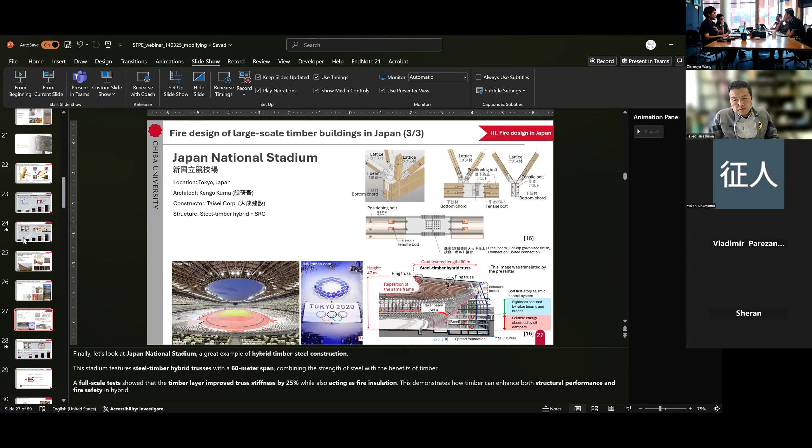So your question is about whether it's okay to use intumescent coatings to protect steel connections with timber components, still the timber, because there's specific guidance from other companies. They say they're not going to use intumescent coating on steel connections because the coating is not going to activate - it's too thin, it's going to keep losing heat, and the coating won't reach the critical temperature or gradient it needs to start swelling.

Well, I think intumescent coating is a very effective way to fire protect timber steel connections because it's easy to install, and I guess cost effective because it can be prefabricated offsite. I'm not sure about intumescent coatings so much, but I think this is a very good way to insulate steel components in timber connections. However, we don't have much experimental data to prove that this intumescent coating is really an effective way to protect timber connections. As far as I know, there's not much experimental data, so I cannot say for sure.

But in my experience, I think wood plugs or plasterboards are better than intumescent coating. If I may, if you look at what the actual slide was saying, Yukito was saying - you see that it's a very small increase.